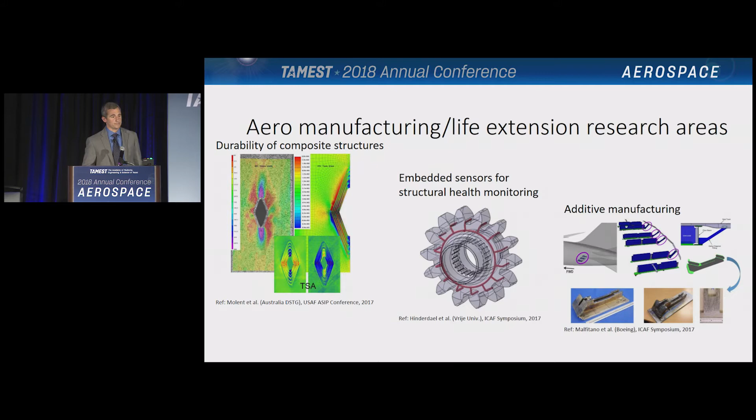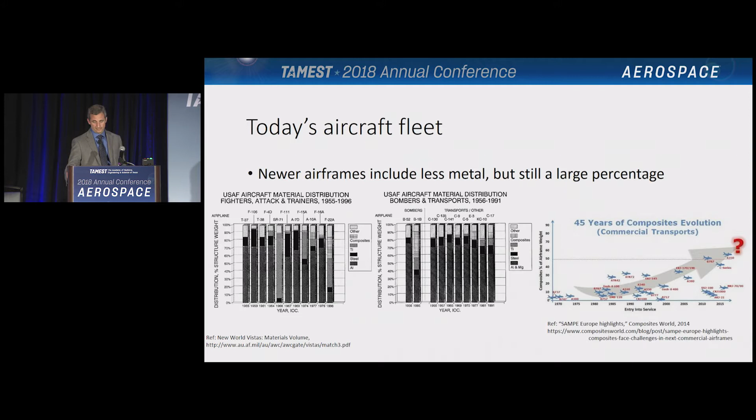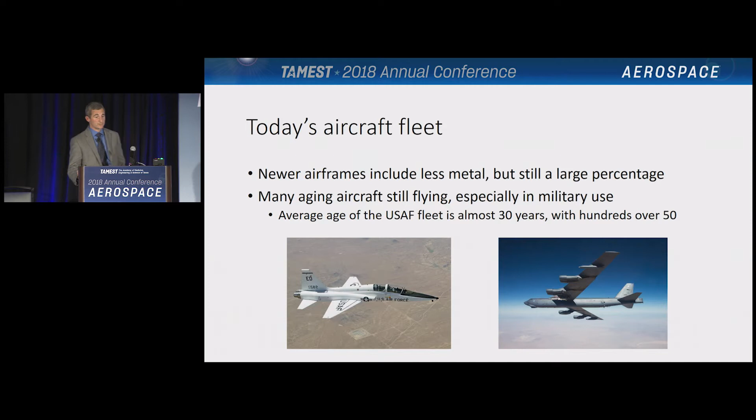So not only do newer aircraft still include a significant amount of metal, but we also still have many old aircraft flying, especially in the military. Like Norm just mentioned, we've got planes flying that are as old as 70 years old. So these two facts have a significant implication in terms of life extension. Metal fatigue has been a critical issue in terms of aircraft maintenance, and it will still be a critical issue for both airframe manufacturing and life extension because of these two issues.

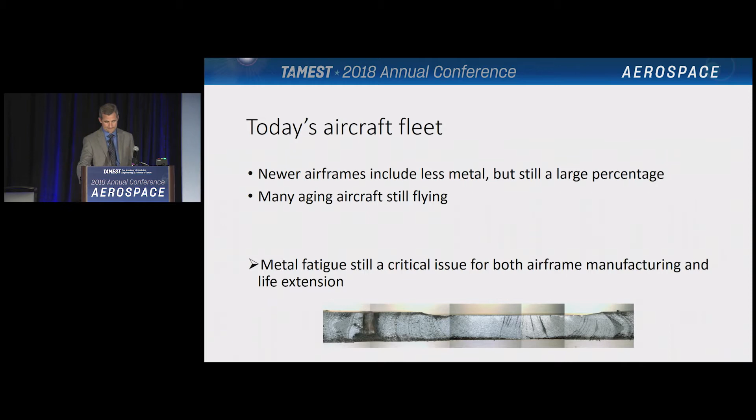Because of that, we have a lot of ongoing research programs related to aircraft fatigue. I'll mention a few here and then focus on a couple for the remainder of my time. The first is NASGRO, which is a fatigue crack growth software used to determine how quickly cracks will grow through these critical areas. The second is Darwin, which has a similar goal, but also includes probabilistic features to allow users to calculate probabilities of failure over time.

The third is ERSI, or Engineered Residual Stress Implementation, which is a working group developed for incorporating residual stresses into these types of crack growth analyses.

We're also working on developing inspection methods to find smaller and smaller flaws in structures, such as this method for looking through bushings into the second layer structure for cracks using low-frequency eddy current.

We have a lab dedicated to solid and fracture mechanics where we determine material properties and grow cracks in various environments and conditions. We also have a lab used for full-scale testing of full aircraft and structural components, which we can also use for development of structural repairs and repair procedures.

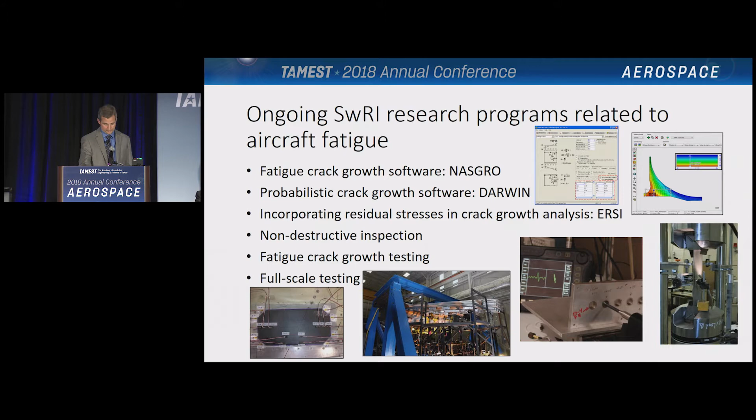As an example of some recent full-scale testing, it's a T-38 wing test where we attached T-38 wings to a fuselage, hung it upside down in a steel frame, and cycled the wings using hydraulic actuators with the actual loads recorded from flying aircraft.

This testing is used to determine the lifespan of the structure, with the usage being flown today, so that any unknown critical areas become apparent in test rather than in the fleet.

After thousands of simulated flying hours, you can see that a crack developed in the lower wing skin and grew to failure. That skin is over half an inch thick, and it broke with a pretty good bang. The T-38 has been flying for over 50 years, and tests like these ensure it can keep going safely.

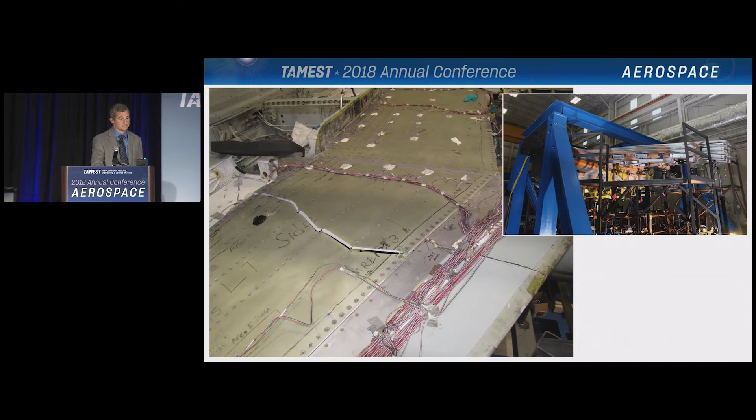So I mentioned NASGRO earlier. This was first developed to provide fracture control analysis for NASA manned space programs in the 80s. The first NASGRO consortium was formed by SwRI in 2001.

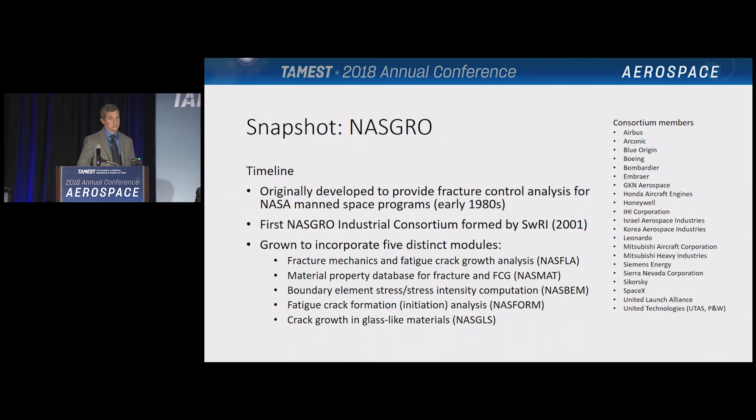In the years since, a lot of work has been done to grow the program to include five separate modules, including things like crack growth analysis, boundary element stress intensity computation, and crack initiation analysis. The consortium has also grown over the years, and now includes a number of quite prominent and significant companies in aerospace, in addition to NASA, who's still heavily involved both technically and in funding.

This slide gives you some insight into the crack growth module, which allows the user to select a fracture mechanics model that best represents the critical location, some material properties to model the crack propagation, the loading spectrum to simulate the aircraft usage, and finally to run and visualize the results.

Every aircraft structure develops cracks, and this allows users to know how long a crack will take to grow to failure and to plan inspections and maintenance accordingly.

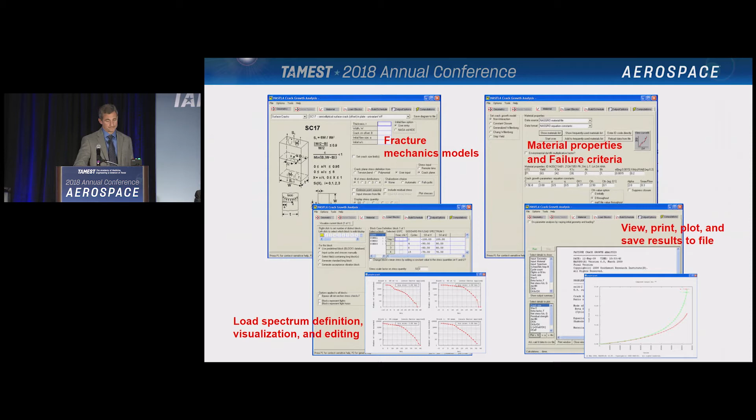One of our most important roles in the ongoing research that continues to improve NASGRO is the development of new fracture models that accurately represent the geometries and loading felt by critical locations. This gives users a consistent, accurate, and simple method for modeling these locations, which would otherwise require development of costly analytical models.

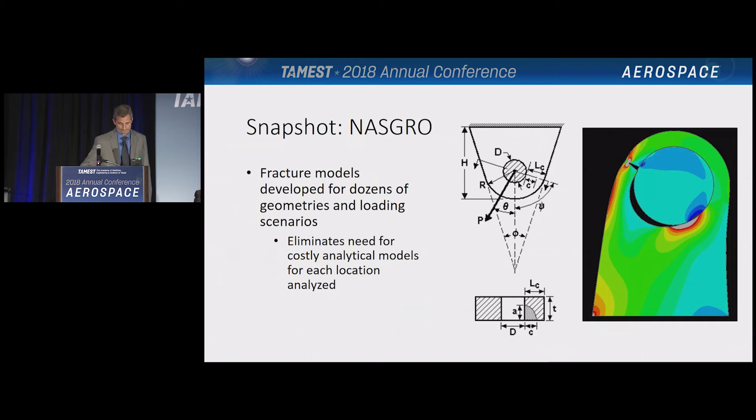So the next program I wanted to talk about was Darwin. Darwin's another fracture mechanics-based fatigue crack growth code. It was originally developed for gas turbine engine components and has since been generalized for other types of parts.

It allows users to link to analytical models and can be used to determine crack growth life and probabilities of failure. Primary funding for this has come from the FAA, with significant funding also coming from other sources, including all the major aircraft engine companies.

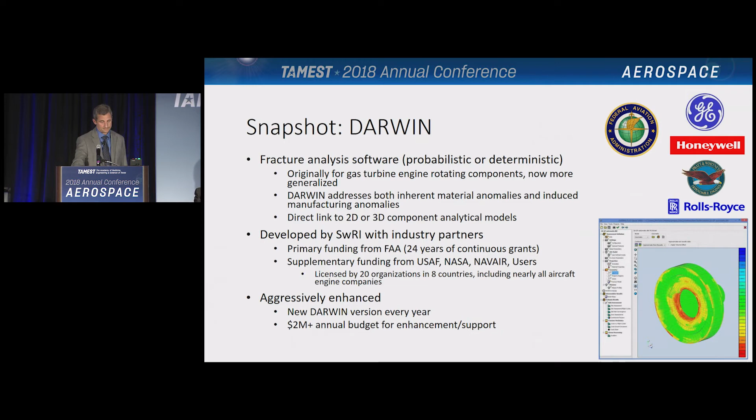This slide gives a summary of the inputs and outputs from the program. Like in NASGRO, the user inputs fracture models and material properties. Then for the probabilistic portions of the calculation, the user also inputs distributions of anomalies or flaws that can grow to become cracks, inspection schedules, and probabilities of detection.

It's the probability of those inspection methods detecting flaws of different sizes in the material. With all those inputs, the program calculates probability of failure versus loading cycles to show the user whether the current inspection protocols will keep the component flying safely beyond the planned life.

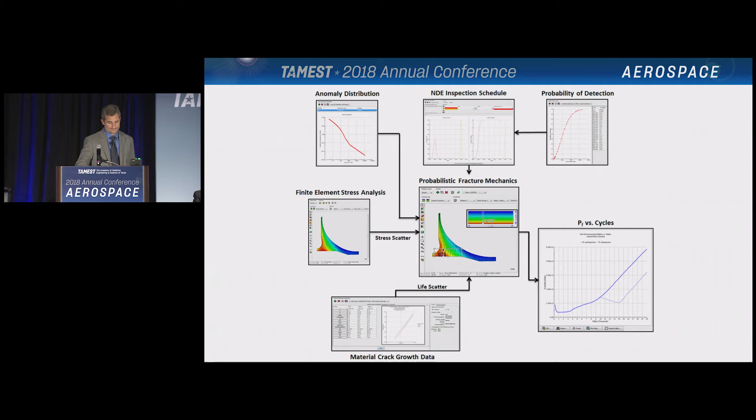One recent addition to the program is the ability to perform fracture risk calculations in additive manufactured parts, which can be more susceptible to cracking than parts built using conventional techniques. Part of this functionality is the ability to link Darwin with X-ray simulation software to map anomalies within the material and determine the risk of them growing to failure.

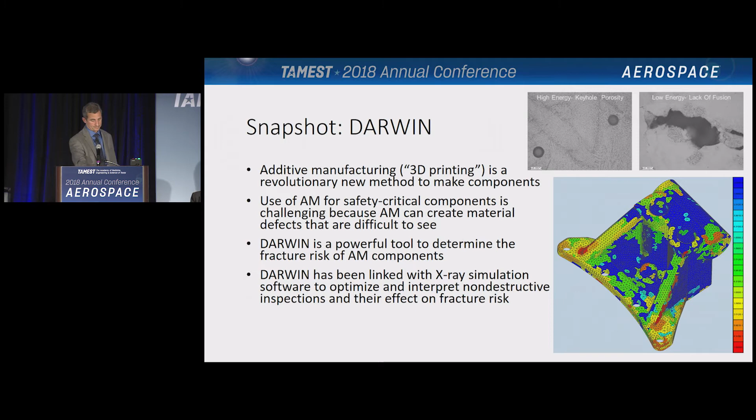The final research program I want to highlight is our work in support of engineered residual stress implementation. At the request of the Air Force, we started a working group in 2016. A little over a year in, we have 78 individuals involved from a wide variety of organizations. This cover slide from a coworker's recent presentation

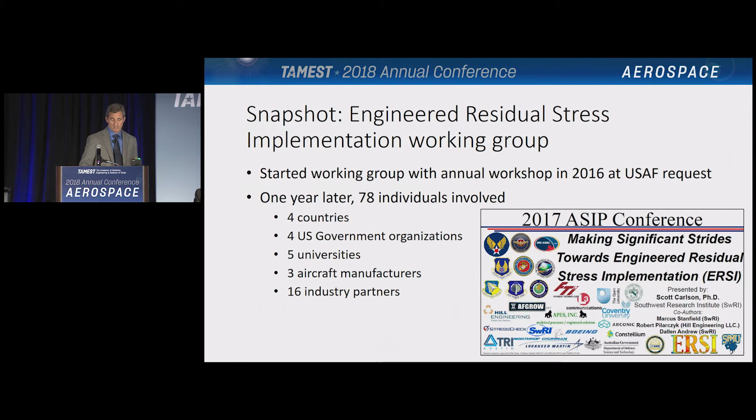at the U.S. Air Force ASIP conference shows the breadth of the involvement. So I'll start off covering the goal of the work by defining residual stresses for those who are uninitiated.

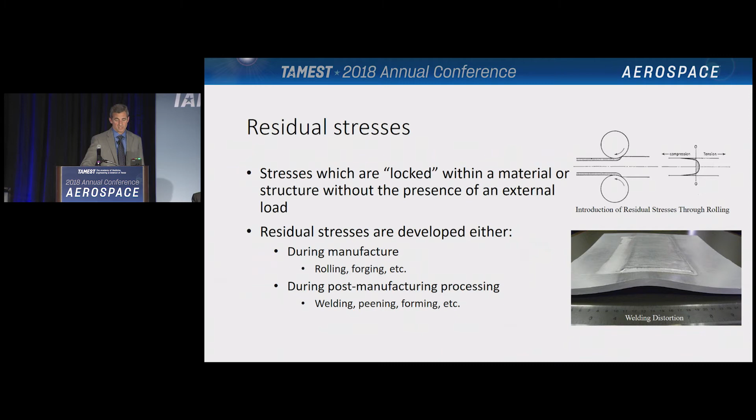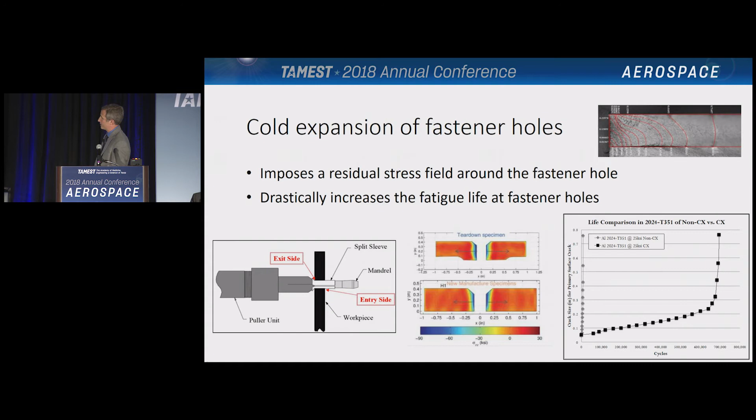So we know that cold working holes causes fatigue cracks to grow much more slowly, but we schedule maintenance based on the expected crack growth. In order to take advantage of that benefit in our maintenance processes, we have to incorporate cold working into our analyses somehow. So how's that done currently?

Well, Air Force guidance on incorporating cold working into analysis, which was written over 30 years ago, is to start your crack growth analysis with a smaller crack size and make no other changes to the analysis. This does increase the analytical life of the crack, as shown in the plot on the right, but it doesn't incorporate the physics of the residual stresses at all. We know we can do a lot better than that with the capabilities we have now.

On the commercial side, in general, the benefits of cold working are not taken advantage of at all in the analyses that determine the maintenance processes. Safety is improved, but maintenance costs are not. So how can we best incorporate the actual physics of the cold working in order to benefit both safety and costs? The Air Force leadership has led us down a path that incorporates a handful of different questions to be answered.

These are not all of them, but here's a few examples. First, quality assurance: was the hole actually cold worked as required? We and others are designing tools that can validate whether it was, so we know whether we are getting the safety benefits that we're planning for in our maintenance scheduling.

Secondly, what effect does cold working have on inspection methods? Residual stresses keep cracks closed, slowing growth, but they also make it more difficult for inspection methods such as ultrasonics to see those cracks. The Air Force is doing research to make sure we understand this effect.

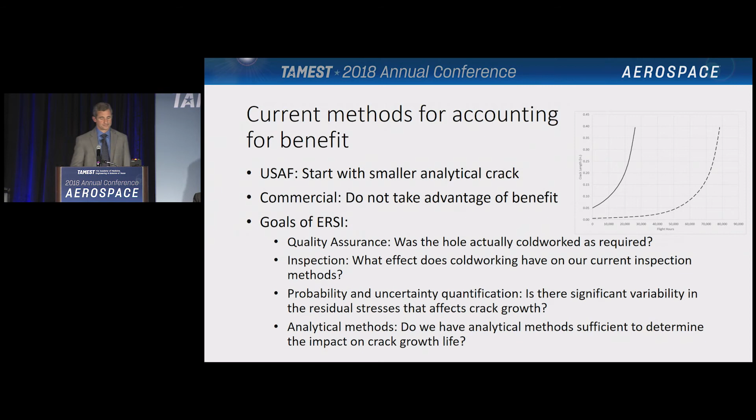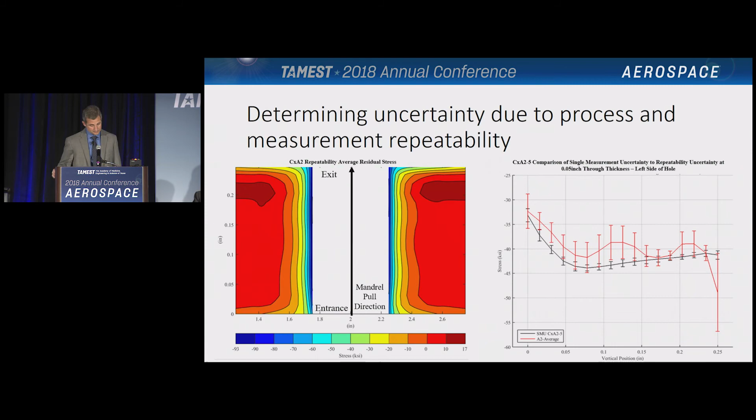So once that was understood for the geometry we were looking at, we had cracks grown in our specimens to different sizes, and then those specimens were cut and the residual stresses measured to see whether the residual stresses change in the part as a crack grows.

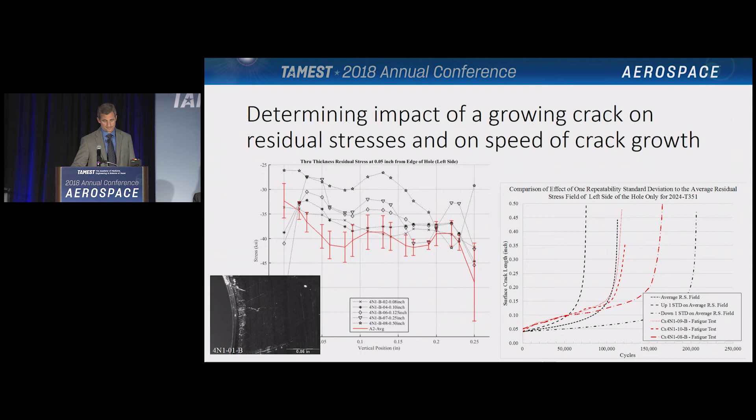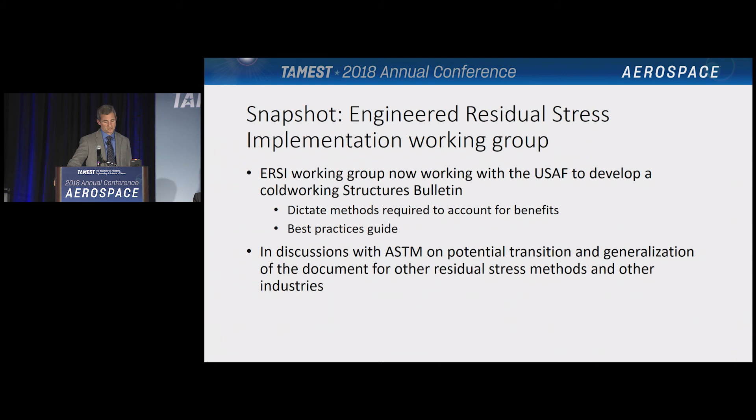So where are we going with this? We're working with the Air Force to develop a document with 2 goals. First, to dictate the methods required in order to account for the benefits of cold working, and secondly, to provide examples of best practices for others to use. There's also some potential for this work to be transitioned to a standards organization like ASTM and generalized to other residual stress methods and other industries.

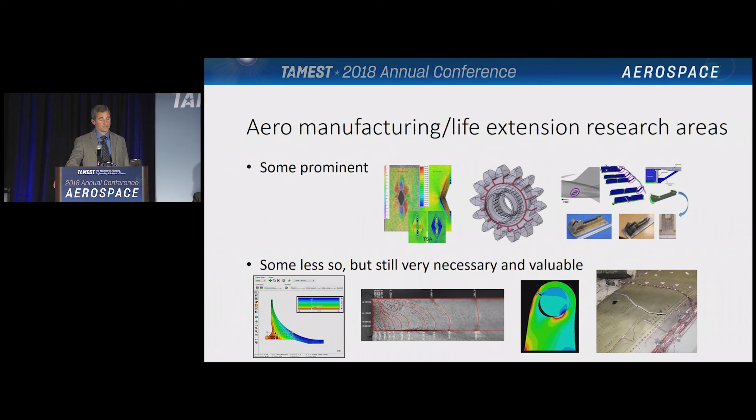So to sum it up, there's a lot of good work being done in aero manufacturing and life extension, both in some prominent areas as well as some areas that are maybe a little less glamorous. But we believe that the breadth and the prominence of the customers and organizations involved in each of these areas just show that their value is significant and that there's still a lot of good work to be done.

Thank you, Luciano. Good. Questions? Yes.

I was wondering, when you move away from metal and start going to composites, you can't use eddy current or magnetic particle to do your inspections, and you start moving towards X-ray or ultrasonics. Has there been any research on what those types of inspection methods, how it would affect the composite over the life of the part? That is not something I'm aware of. I'd like to say yes or no, but I don't know.